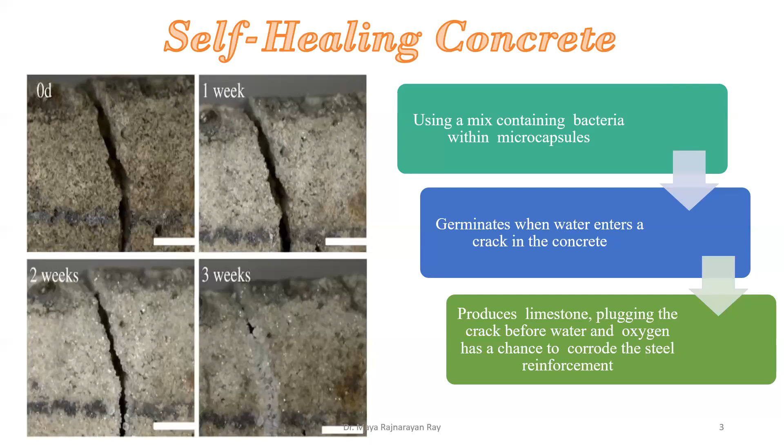The germination process and microcapsules activate on their own. Nanoparticles are also used in these microcapsules, and these nanoparticles have the capacity to expand to micro and macro levels as per requirement. This is how the entire healing process happens. This is another field which is going to make a big revolution in the construction and civil industry at large. The next thing is thermal bridging.

Like if some of you might have visited Delhi, Nehru Place is an area there. If you go and visit that place, you will see that if you are in some store or shopping mall, you will be comfortable. But as soon as you come out, you will feel as if you are in a boiler, and the heat coming out from the AC compressors is so high that the entire area is heated so much that you will not be able to stand in open areas for 5 to 10 minutes. So this is the scenario.

Basically, solar radiation gets into the wall, and heat gets inside the home. And to control the inside heat, we are using more and more ACs.

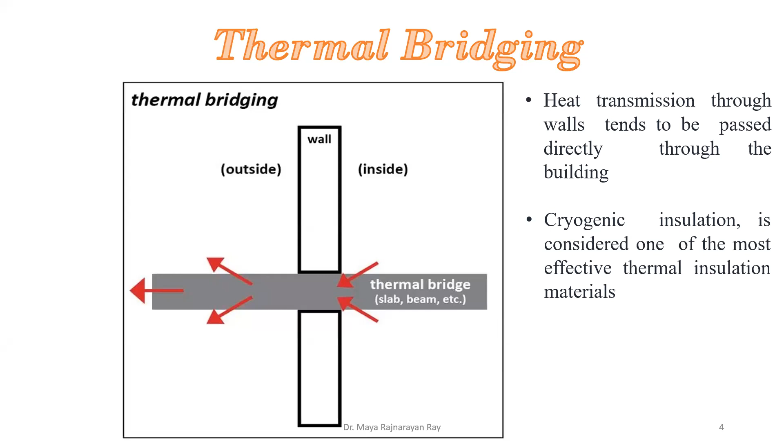So basically, the concept is why not prevent that heat getting into the home. Cryogenic insulation is a technique which is considered the most effective thermal insulating material. With this cryogenic insulation technique, we are protecting our walls, our joints, the slab-beam connections and beam-to-beam connections, and insulating the structure in such a way that we can maintain the indoor temperature as per our requirement. And no matter how sunny the days are, the solar heat will not be that devastating in the home.

So this is a development which is definitely going to make a revolution in upcoming years. Because of that, our dependence on electronic gadgets like ACs and heaters will be reduced, and as a result, our energy consumption will reduce. Our economy will be improving, and it is going to make a big impact on climate change and global warming effects.

The third one is photovoltaic glazing. This is a technology in which the entire building, no matter how many floors it has, is enveloped or covered with solar panels or photovoltaic glazing materials. The solar energy directly coming onto the exterior walls of the building is converted into energy, and that energy is utilized for different activities and works in the building.

That way, this extensively reduces the bill, and it reduces the tariff. It also reduces the dependence on electricity supply resources like an electric public limited company, state electricity supply, or any such resources. So that way we will be blessed. We are facing so much load shedding and power cuts every day, so in that situation, we will be independent on our own.

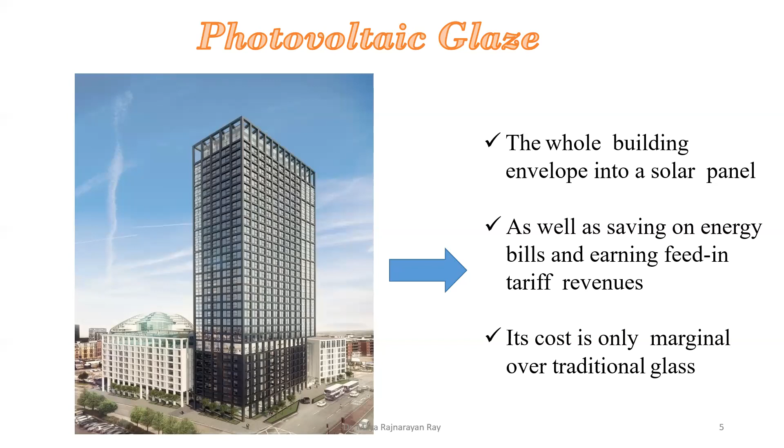Moreover, it is extensively reducing our bills for AC and heaters. In cold regions it reduces the heater bills, and in hot regions it reduces AC consumption. So that way it is beneficial. Also, a lot of heat generated by operating heaters and ACs goes directly into the environment and affects the weather and climate, so that way too we are on the beneficial side. So this is another revolutionary technology. Next is kinetic footfall.

So kinetic footfall is another... Yes, anything? Anything? You can continue. You can continue.

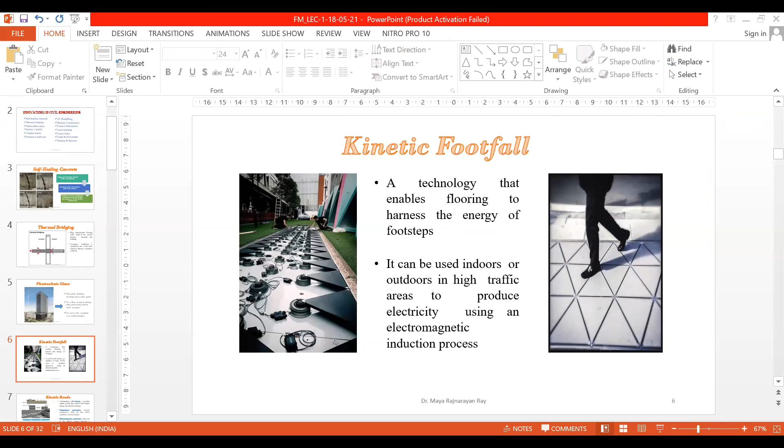So kinetic footfall is another technology. What is this technology? Say we are health conscious and we set a target of walking 3,000 or 5,000 steps every day. If I get to know that when I walk 5,000 steps, that energy is converted into electric energy, and that energy is used for my indoor or outdoor lighting, then how good it is. It will be a pleasant surprise for all of us.

So this is the kind of technology in which the kinetic energy of moving things, either human movement or vehicular movement, is harnessed and converted into electric energy, and it is useful for the indoor and outdoor lighting of societies, homes and domestic utilities. Electromagnetic induction processes are used for this kinetic technology. These days, piezo tiles are also very useful for this.

Many buildings are designed as per green building norms. In India, green building regulations were published by the Indian government in 2009, and as per those, piezo tiles are also a part of the green building norms. So you can use them, and many societies designed in Bangalore and other big cities as per green building norms are utilizing this technology, either at the entry of the society or at different sides. Piezo tiles are also installed on footpaths.

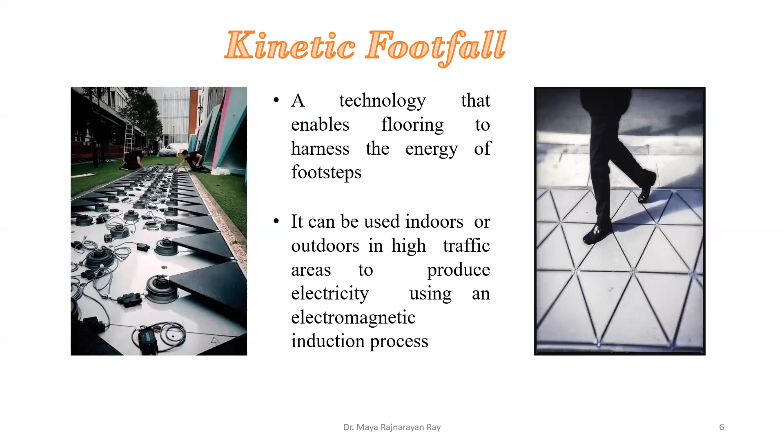So when people are walking on the footpaths, or they are going for a morning or evening walk, then that energy is directly converted into electrical energy. So this is also going to be a big revolution in the construction industry and overall civil engineering.

Another new technique is kinetic roads. Kinetic roads are again the same technology working on kinetic footfalls, but here we are harnessing the vehicular movement. This technology is called Lybra technology. The University Polytechnic Milan has developed this technology. In this, a tire-like rubber paving converts kinetic energy into electrical energy.

So you can see in the left tile, image one here, a pavement. The top black line is the pavement line, and on that one car is there. Below that line, you can see that an N-type silicon and P-type silicon layer is installed in the subgrade and subbase only.

When any vehicle is moving on the road, below the finishing surface or pavement, that kinetic energy is harnessed with the help of N-type and P-type silicon and collected as direct current. Through an inverter, this direct current is converted into alternating current, and this alternating current is utilized for indoor and outdoor lighting.

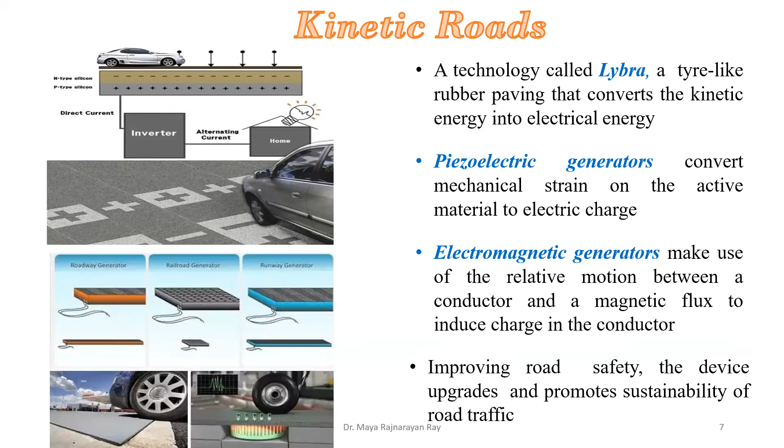In India, in many places these kinds of practices and concepts are being adopted, but we are yet to adopt them at a massive level and make them more popular. But all the youths like you who have an interest in learning and doing things will be helpful in spreading such technology and making it more popular.

Another technology is predictive software. Generally we have design software, modeling software, analysis software, management software, many kinds of software. But we are still lacking predictive software, in which we can predict the life of a structure, its health, its performance, and model the behavior of the structure. That is very helpful.

That is going to be very beneficial, and also going to prevent a lot of hazards if such a revolution is done. This predictive software will help forecast the lifespan of the structure. Even the efficiency of the structure can be forecasted. Based on such forecasting, the administration can take a decision to demolish a structure which is in danger. That way we can save a lot of lives.

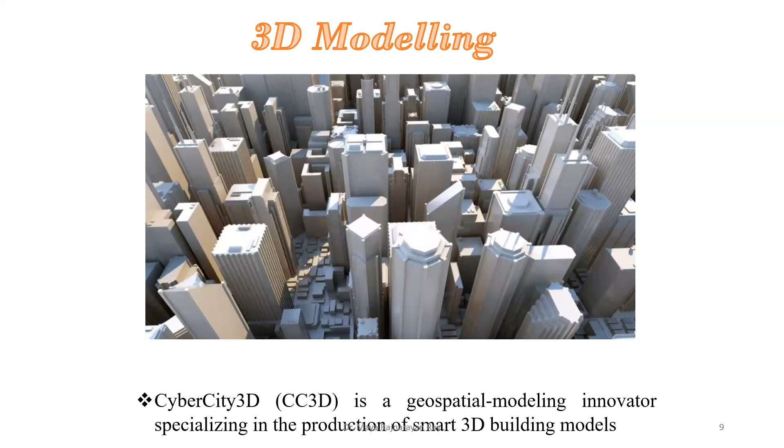Another field of recent development is modular construction. So what is modular construction? Some of you might have heard that recently in UK and China, approximately 57-floor buildings were constructed in a few weeks. Wasn't that a surprise for all of us? Can you imagine how much time an almost 60-floor building requires with traditional construction practices? Definitely 1 or 2 years.

Even if everything is monitored properly and a precise time frame is followed, it will take more than 2 years. But with modular construction technology, we can do a huge task in a few weeks or a few months. How is it done? Major building elements are constructed off-site in factories and brought on site after construction.

We bring a frame on site, and it is just installation and joining of that frame. Majorly 70% of the work is done off-site in the factory and 30% on site, right from the foundation to basic element connections. That is why China could complete a 57-floor building in a few weeks. This is modular construction.

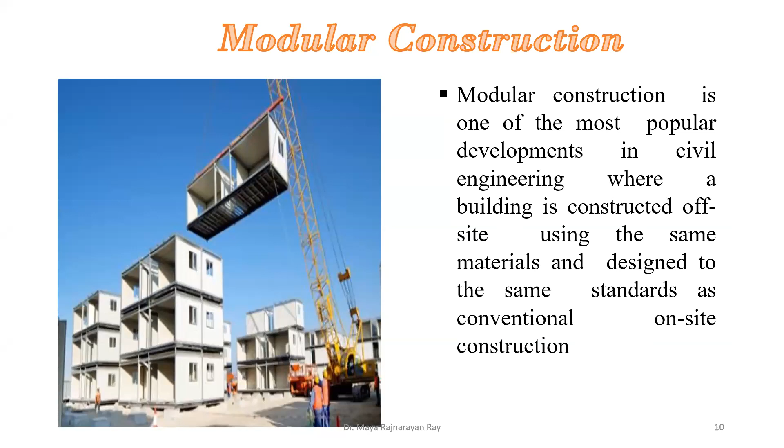This is the miracle of modular construction technology, and we have also started adopting that technology in India. In India, at many places we are adopting that technology.

In traditional construction technology, those who have site exposure or real field experience might know that the entire work on site is not digitized, and no automation is there. Now, these days, automated concrete mixers are there. That is also a blessing of development.

But still, we do so many things on site manually, and manual records are being kept, and then it is communicated to head office or designer or architect as and when required, either in soft or hard copy. But that is really making their task difficult.

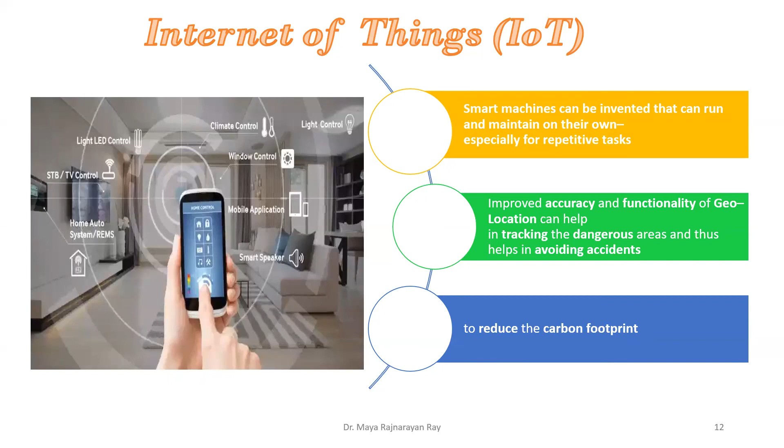Another new technology is drone technology. Drone technology these days we are utilizing in India in marriages, in rallies, in security and all. But can you imagine that in foreign countries where apartments are of 100 or 200 floors, any human can go to that number of floors and repair a crack developed outside the wall? Is it possible by any human being? No, it is not possible without the intervention of a machine.

So in that situation, when high-rise buildings are there having 100 floors, the drone is the technology which is utilized to identify and detect the cracks. Even drones are used for repairing and maintenance of any kind of faults and cracks in certain projects. So drones are basically employed to monitor the site, permitting the inspector to control large site areas while sitting at one place.

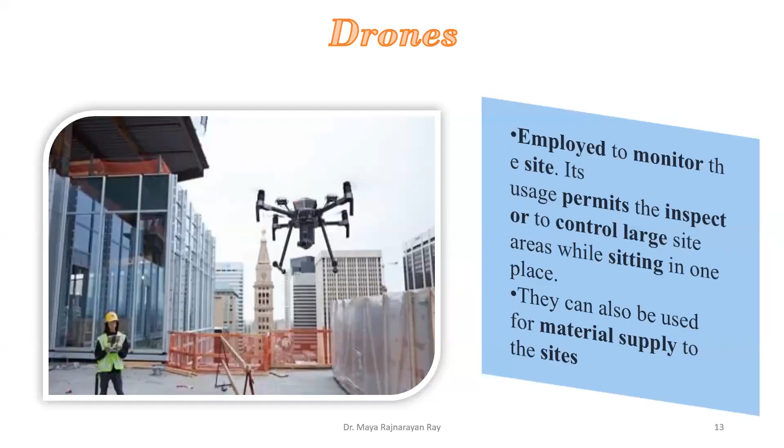The next upcoming technology is asset mapping. Asset mapping involves remote sensing and GIS capacity of engineering advancements. With the help of GIS and remote sensing technology, we can map the assets of any particular city or town, keep records of such assets, and evaluate them from time to time.

So how is it done? Suppose in big cities, at different locations and public places, at roundabouts where there is more population and more pollution, air purifiers are installed, and each air purifier costs almost a few lakhs. So if such air purifiers are called an asset, then public buildings and government buildings are also assets. Such engineering assets can be monitored.

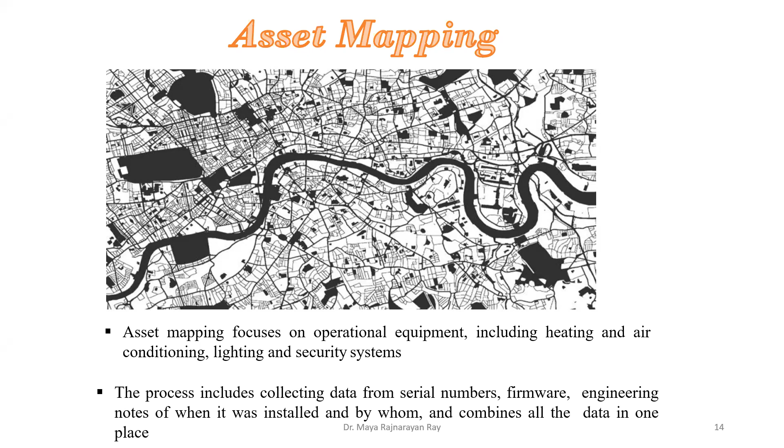Even in forests, important woods are there, like sandalwood, and teak wood in Burma, and such kinds of trees are also called assets.

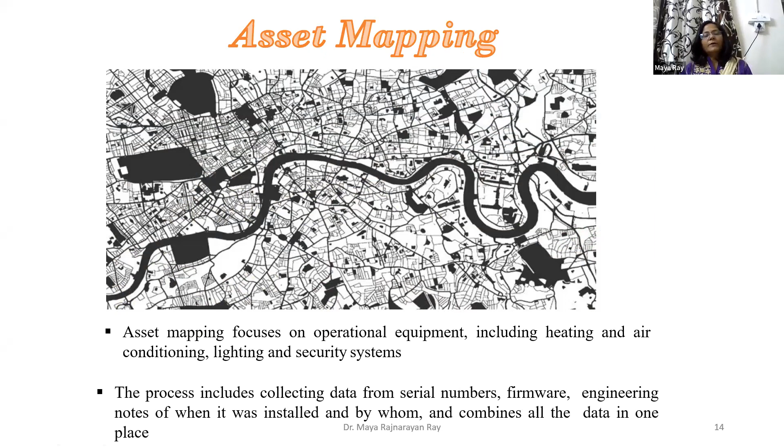Another upcoming research area is plastic roads. This is a new technology which utilizes garbage plastic, polythene and other plastic items from the garbage, out of which plastic balls are formulated or made. These balls are combined with asphalt and common road construction material, and utilized in road construction.

So pavement is done with the help of these plastic balls. Basically the pavement is a perforated pavement, and it is permeable to a great extent. Earlier, pure asphalt road or concrete road was not permeable pavement, so when there was rain, the pavement didn't allow water to get into the ground. But with these plastic roads, after rain, water will be able to get into the ground, and recharging of groundwater will take place. So that is going to be a big blessing for us, because we will conserve water in the ground.

Another thing, plastic garbage is increasing day by day, which is creating a huge environmental threat. So that should be utilized properly, and if it is utilized in a proper manner, then the environment can be saved. So this is another beneficial activity.

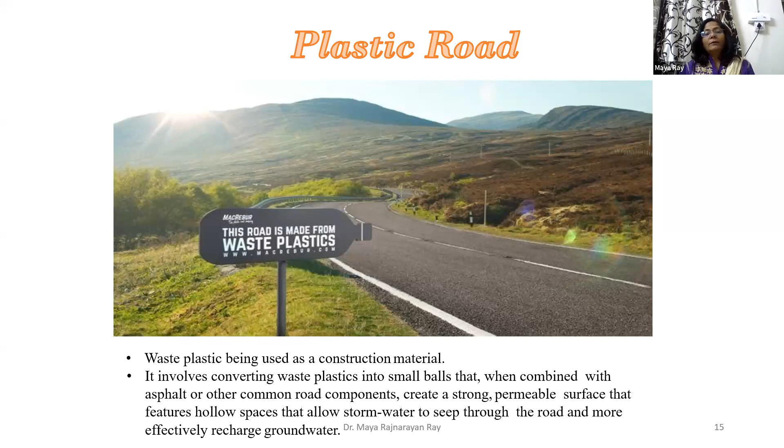Another activity is grass on the green roofs, or grass on the roof. So all the big buildings are creating terrace gardening. This activity basically keeps the building cool, especially the top floor. It also reduces runoff, because in rainy days buildings having green terrace gardening will induce less runoff compared to buildings with barren terraces. This way it will control pollution, make us sustainable, and reduce our dependence on the outside market for vegetables and fruits to a certain extent.

It gives a human being the chance to be with nature. It is an intangible benefit, but it is a big benefit. It also gives a kind of pleasure when you grow your own vegetables. So there are many such intangible benefits, but only the tangible benefits are cited here.

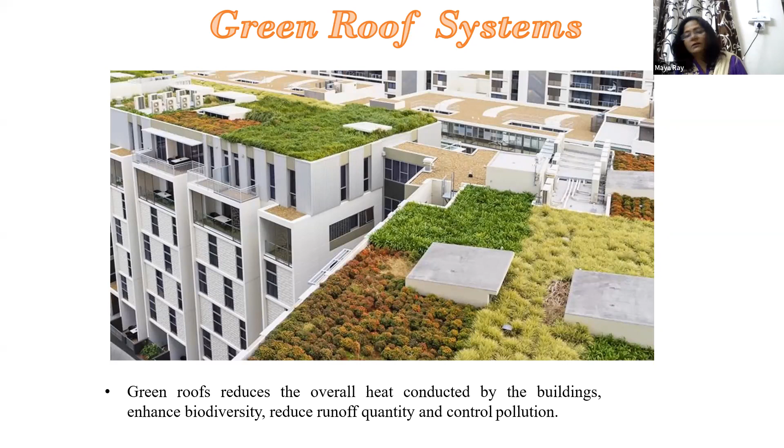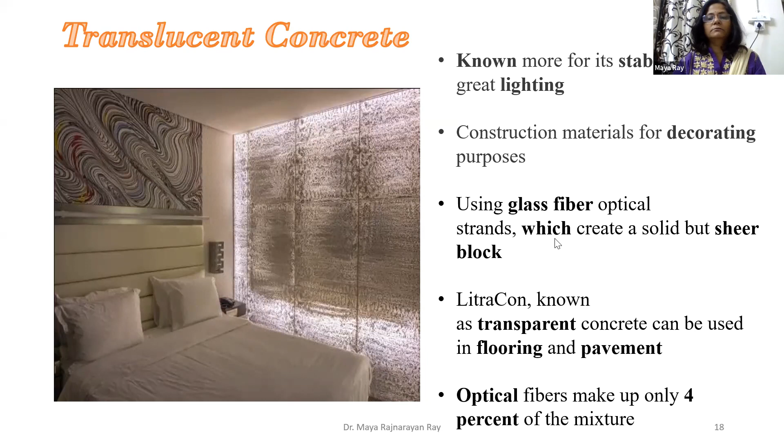Another material is Sensitile. Sensitile is a tile such that when you are waking up at night and want to go to the washroom or kitchen, and the entire room is dark and you don't have light, if you just put your foot on the floor, twinkle lights radiate your path - it's a wonderful experience. Such kinds of tiles are developed in which, when there is human movement, twinkle lights will light your path.

Terrazzo is a surface that creates lighting on the floor, and it is especially used on the ceiling, floor, and walls also.

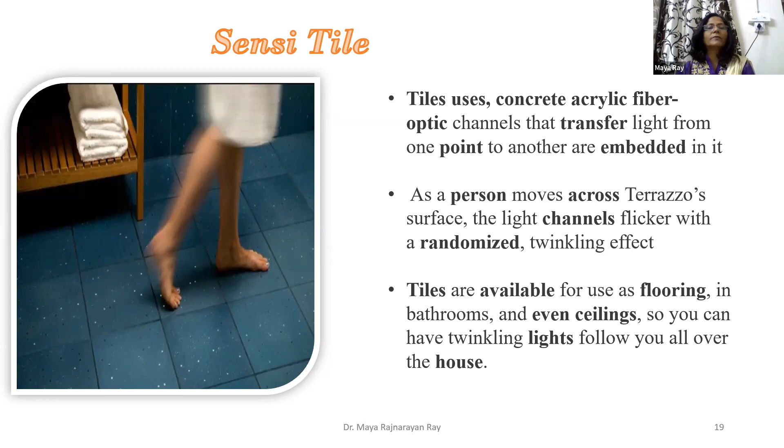Electrified wood is another recent development, basically developed in Europe. When you have many electrical decorating lights or electric gadgets, you need more electric wires. But what if your wood tables and chairs give light on their own? So the wood tables and chairs are designed in such a way that a certain material is provided and pressed wood is prepared.

Basically, like plywood that you see, laminated wood is a kind of wood in which, between fine sheets, material like paddy husk is pressed, and that way the wood is prepared.

But instead of that, certain layers of metal are prepared, and that way electrification can be done. Here, 12-volt power is supplied and fed to the metal layers, which are built into the wood sheet. Connectors are made with the lamp, and one device is connected with each other device. So the lighting will be such that your table will emit light, your chair will emit light, and you don't need to install light separately in the room or anywhere else.

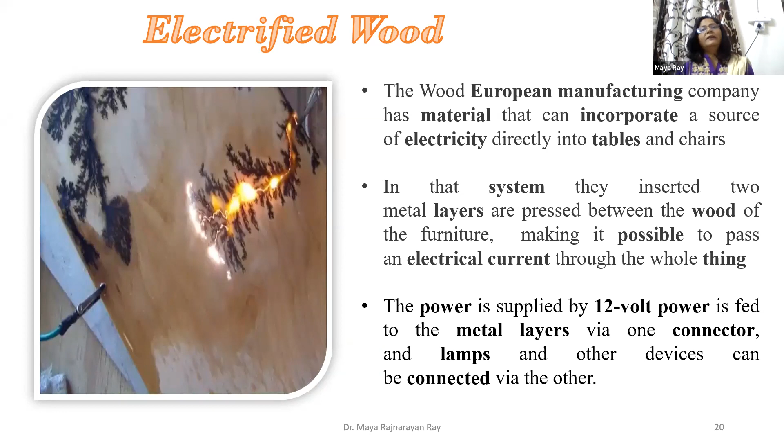But up to this date, this technology has not been found very useful or successful in utilization. So, many such construction materials are there.

Then Flexicomb is another construction material, and RichLite is another construction material. Flexicomb is a material that uses polypropylene tubes in a honeycomb type structure, which is basically flexible in nature, and that is why it is called Flexicomb material. This material basically has a convex bend in the convex direction and is rigid in the concave direction. This is going to be a very innovative area of research and innovation in the construction field.

It is basically used for decoration, lighting, and monument installation, etc. RichLite is another construction material that is almost indistinguishable from wood.

You might have seen a wood counter, but have you ever heard of a paper counter? A counter made from paper, so pressed paper. That is the first innovative concept, basically made from 70% recycled paper.

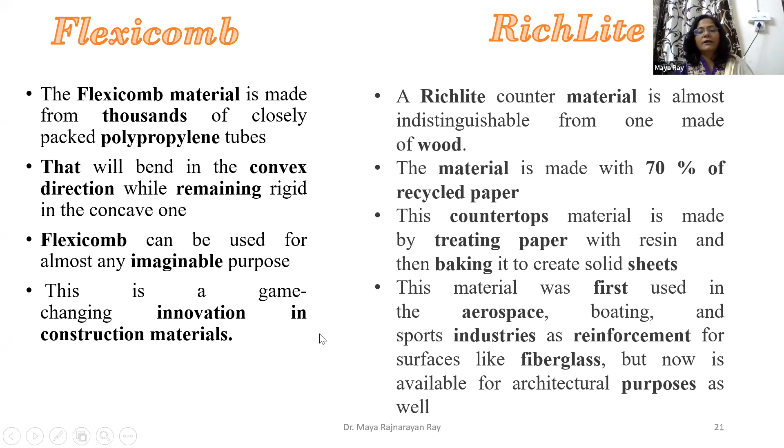This is also creating a huge revolution in the construction industry. It is very light in weight, and this kind of material is used in aerospace and space shuttles. Later, with the help of fiberglass composition, it is used in the construction industry for many architectural and decoration purposes.

Self-healing cement is the same as self-healing concrete. It has its own healing ability and generates a glue-like material when a crack develops on the surface. This glue-like material fills and seals the crack, and that way it heals on its own.

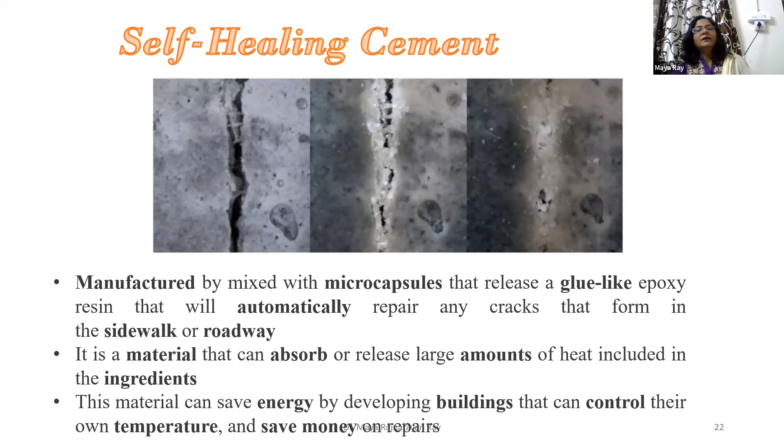Another material is carbon fiber, which is revolutionary. You can see a mesh type of structure made with carbon strands. Carbon strands are very thin, even thinner than human hair, and they are woven like cloth.

You might assume this material would not have high strength and stiffness, but surprisingly it is 5 times stronger than steel and 2 times as stiff. Even the weight is very less, about two-thirds less. This kind of structure also has flexibility.

It creates a flexible surface and structural material. This is going to be a revolution in areas where hurricanes and tornadoes are often seen, especially in coastal regions.

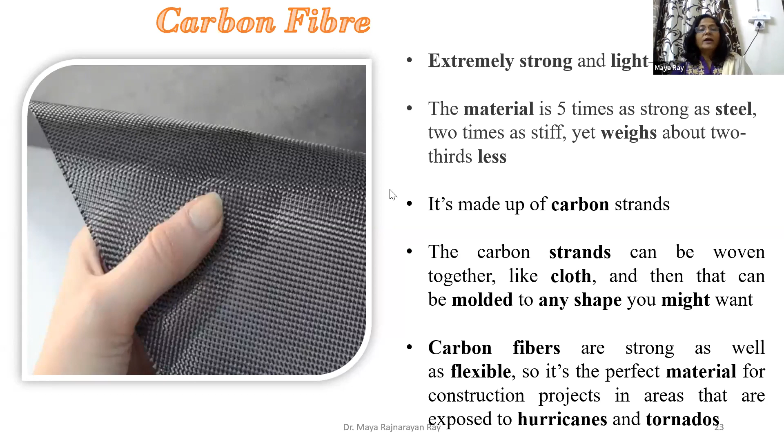Buildings constructed using carbon fibers will have the ability to bend and then regain their shape. This way, there will be less loss of human life. So this is going to be a revolution.

Liquid granite is another upcoming research area. It is actually as good as cement and has the capacity to replace cement. It is very light in weight, and its bearing capacity is also very good.

The proportion used is 30 to 70%. This is made from recycled material, and it also reduces carbon footprint. It is very fire resistant, and most beneficially, it can withstand temperatures of 1100 degrees Celsius.

If concrete is exposed to a temperature higher than 1100 degrees, it will blast, but this material will not blast. So this material is also going to be a potential construction material that will very quickly replace cement.

Also, the embodied energy generated in this is very less, and its environmental impact is very less to nil. So it is going to be a blessing for humankind because we are using recycled material.

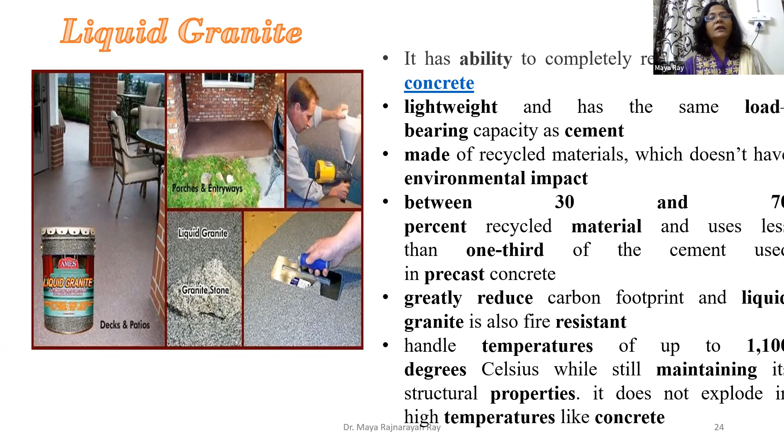So there are so many upcoming materials and technologies with recent advancements. Even fluid mechanics is finding many applications in new developments like high speed engines, wind turbines, and pollution dispersion technology, since pollution is a big problem these days.

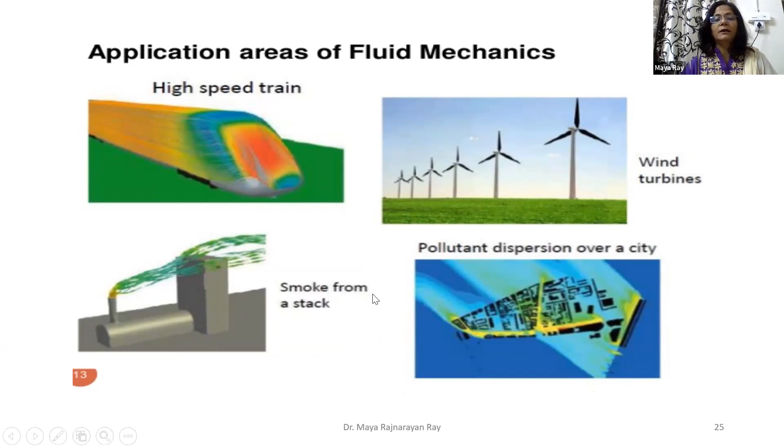So friends, this is all about my presentation, and I just wind up here.

Can you imagine that your football or cricket ball works on the principle of fluid dynamics or mechanics? You would be surprised. A golf ball is also designed on this principle. These are all surprising research areas and upcoming fields, finding applications of basic engineering, basic mechanics, and new technologies.

So with this, I just wind up my session.